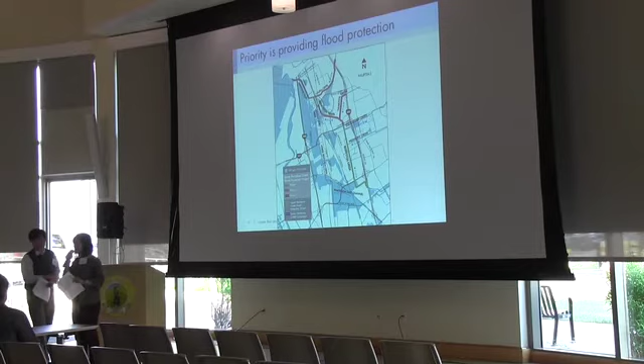So now I'd like to introduce Ngoc Nguyen, the Interim Deputy Operating Officer of Watersheds. You may remember him from last time, and he oversees this project. Thank you.

Good evening, thank you. My name again is Ngoc Nguyen, and I'm currently the Interim Deputy Officer for Watershed Design Construction. My division, I work with a number of staff responsible for designing and constructing flood protection projects for the county. I just want to quickly introduce the team with me tonight. We have Jose Villarreal from our communication office, Peggy Lam in the back with communication, Kristen, who introduced herself earlier, Kevin Gonzalez our assistant engineer, Johan Lee our associate engineer, and James Nanitagos our environmental planner, and then we have Carl Newman, the newest member of the team.

Carl recently received a promotion from associate engineer to engineering unit manager. So Carl is helping me manage a number of projects in his unit, and this is one of the projects now under Carl.

I just want to review quickly for you the map showing Berryessa Creek flowing from south to north towards San Francisco Bay. The most upstream section of Berryessa Creek, from Calaveras Boulevard, Highway 237, going upstream to Highway 680.

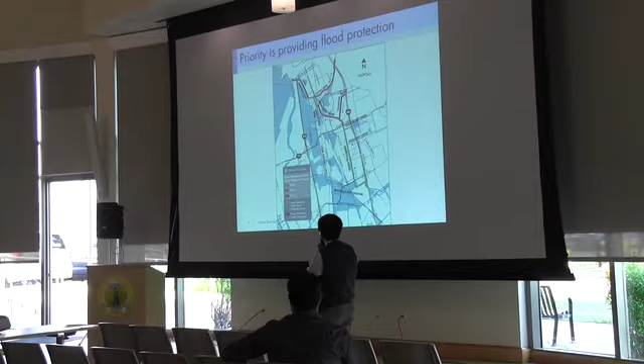Also part of the Lower Berryessa Creek project by the Water District, we have flood protection planned for a portion of two tributary creeks, Calera Creek and Tularcitos Creek. Together, these projects provide flood protection for about 2,400 parcels of homes, businesses, and schools in the city of Milpitas.

Here's another map showing the delineation of the project alignment.

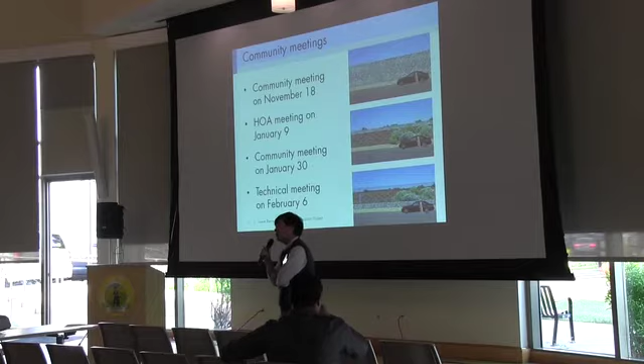This is a quick recap of the number of meetings we've had with your community since November 2016. The last meeting with the larger community was on January 30th, also in this same room. A week or two after that, our technical expert at the Water District met with Mr. Chu and some representatives from your community to look into more detail and get more information from our in-house subject matter expert in hydraulics and hydrology.

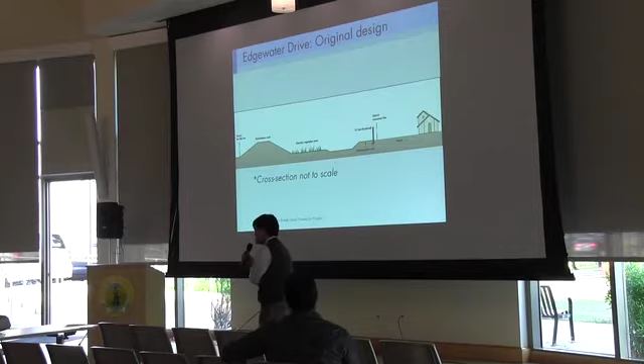Let me quickly recap, because some of you here today weren't at the last January meeting, so bear with me if the information is redundant or you've seen or heard it before.

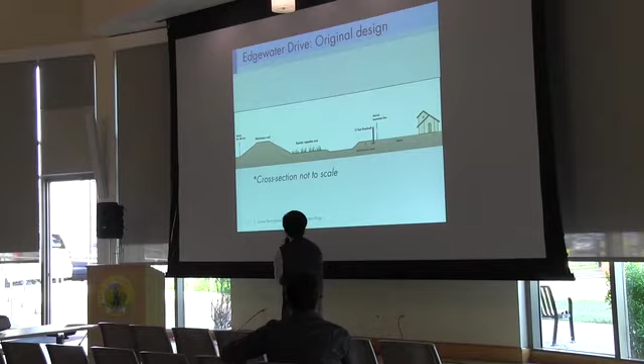The cross-section in front of you shows the current design, which has been approved, permitted, and is under construction. Construction started on this project last summer. What you see is what we refer to as a typical cross-section, looking upstream as if the water is flowing toward you.

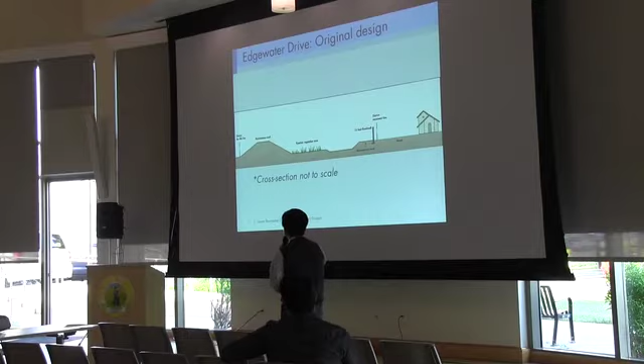The proposed project is a levee raising on the hidden lake side because, number one, we do not have room to provide two levees for this creek and still provide the required flood protection conveyance for the community. We only have enough room to raise one levee, and on the other side we have to build a flood wall.

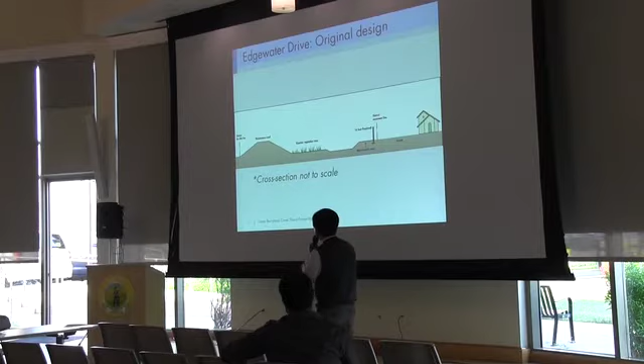The levee was selected on the hidden lake area because there's a top of levee road trail there, a recreational trail maintained by the city of Milpitas, a continuous recreational trail for the city, located on the hidden lake area on the levee side.

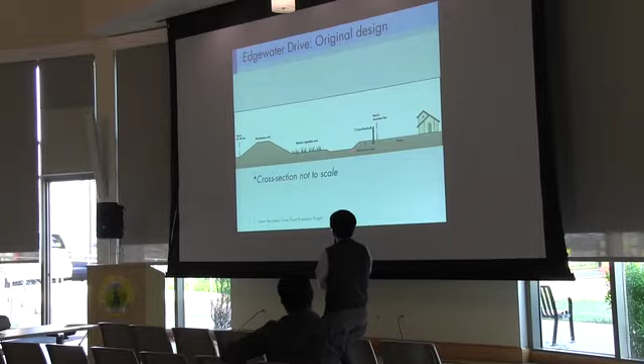The proposed project here, the cross-section showed a flood wall, a low flow channel, a maintenance road so that the water district would have adequate room for crews and construction equipment to be in the channel to maintain the flood wall, to maintain the channel, and to have access in case we need to go in and remove vegetation, debris, fallen trees, or blockage in the channel.

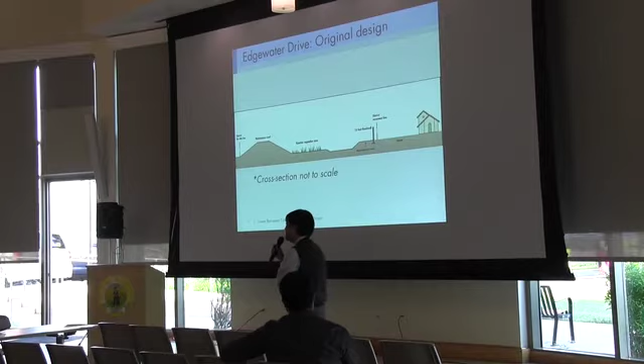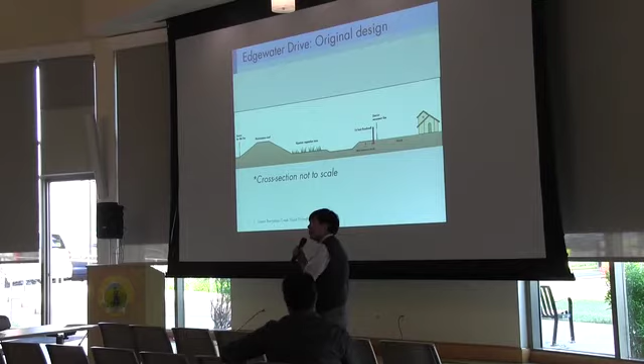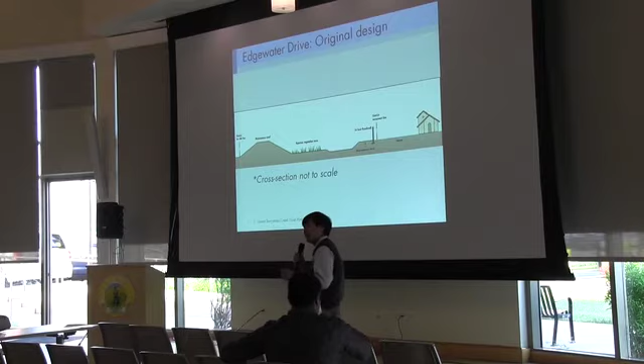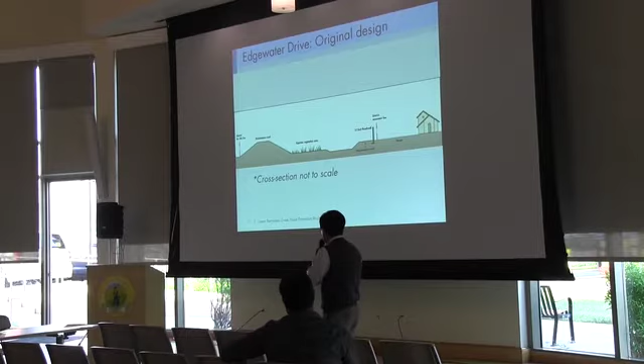On the other bank, there is an area designated as riparian vegetation area. That's the area where trees and vegetation will be planted as part of the project to provide habitat for the wildlife in the creek, and it's also required as a mitigation measure. That's a term Water Resources Agency uses when you have construction or disturbance in creeks or aquatic habitat. The agencies usually require you to compensate for the impact. In this case, the disturbance is to the habitats, the trees, the wildlife in the creek, so planting of trees and vegetation in the creek is a mitigation measure required by the regulatory agency.

One of the options that we presented to the community in January, which we refer to as option number 1, involves pushing the 14-foot high wall. If you remember, before, the wall was close to the curb of Edgewater Drive. This option basically involves pushing the wall 15 feet away from Edgewater Drive toward the creek.

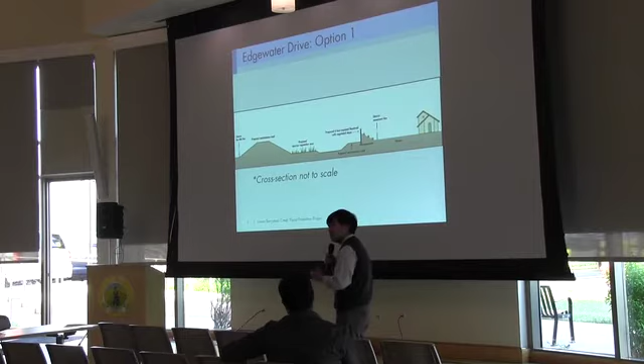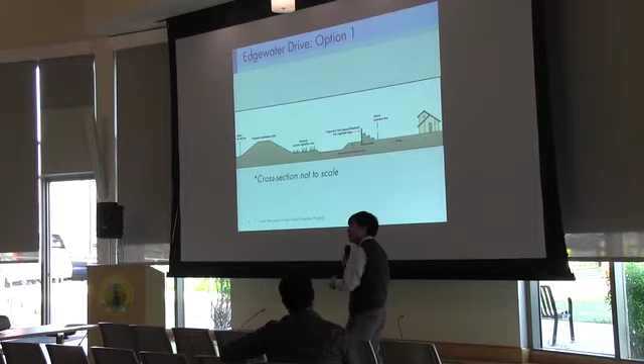The reason for that is to lessen the impact from looking at a flood wall. In this case, the maximum that we can push the wall toward the creek is about 15 feet and still maintain the room in the creek to convey the flood protection flow safely through the area.

We also propose in this option that on the land side of the flood wall we would backfill the embankment with soil, and on the embankment fill we would plant vegetation. Again, it's another measure to lessen the visual impact from looking at the flood wall. The top of the flood wall will have to be exposed about 4 feet, and this is a safety measure because on the other side is a 14-foot drop. We just don't want people to get on top of the embankment fill without a barrier and accidentally fall onto the creek and hurt themselves.

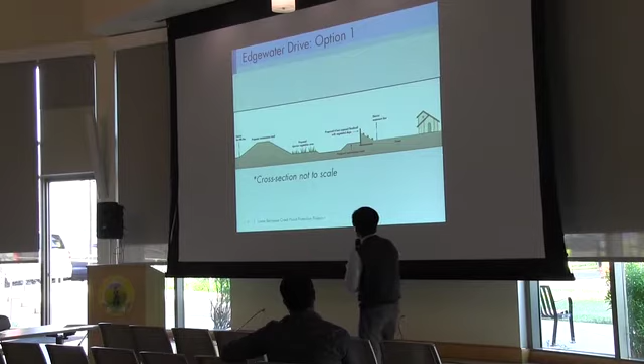Now, to accommodate this option of pushing the flood wall 15 feet away from the street toward the creek, the cross section - the area in the creek - will now be narrower by 15 feet. In order to still accommodate the amount of flow required to provide flood protection, we have to reduce the width of the mitigation planting area by 15 feet. The width of the riparian planting area was about 50 feet in the current design, so this riparian planted area will now have to be 15 feet less.

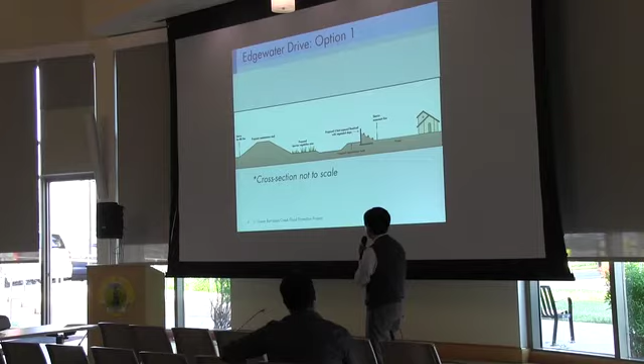We looked at the entire alignment, and we do have room upstream and downstream of the Edgewater area within the project limit to make up the deficit in planting from reducing the width of the mitigation planting. So there is available, limited room in the project area to make up for the reduction in planting, should it be feasible to go with this option.

This option is option 2, which I also presented to the community last time. It has a similar concept of pushing the 14-foot high flood wall 15 feet away from Edgewater Drive. We would also backfill the landside embankment with soil for planting of shrub and vegetation.

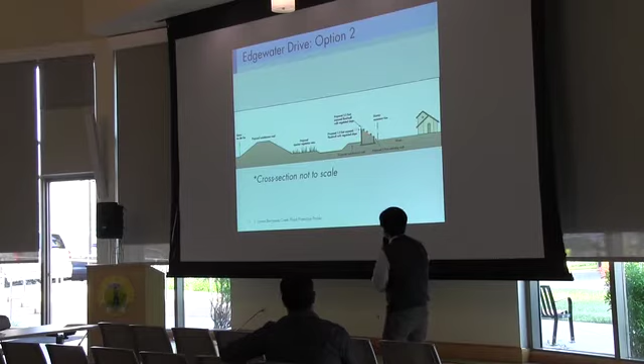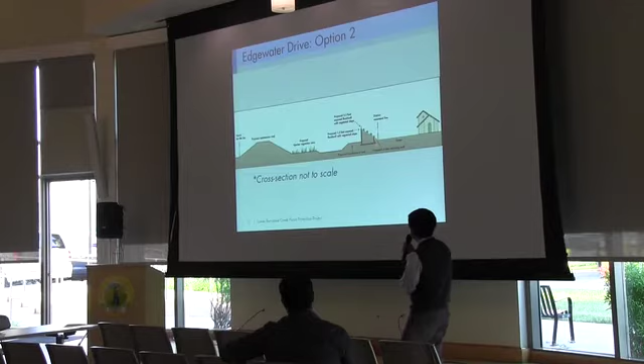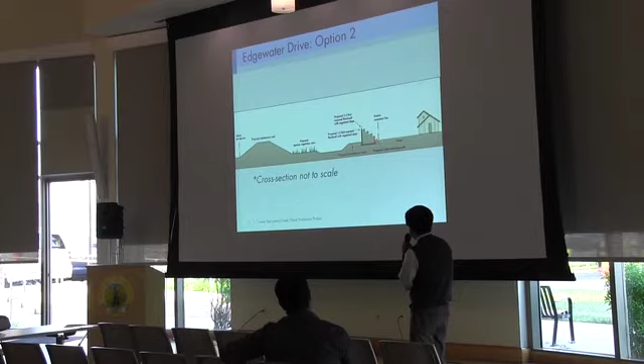The difference between this option and the previous one is that we would carry the embankment all the way near the top of the flood wall, so you'll see maybe 1 foot of the top exposed. In order to have room for that, we will need a retaining structure on the land side to contain the slope, so the proposal is a shorter, maybe 5-foot high retaining structure to hold back the soil and allow backfilling all the way near the top of the 14-foot flood wall.

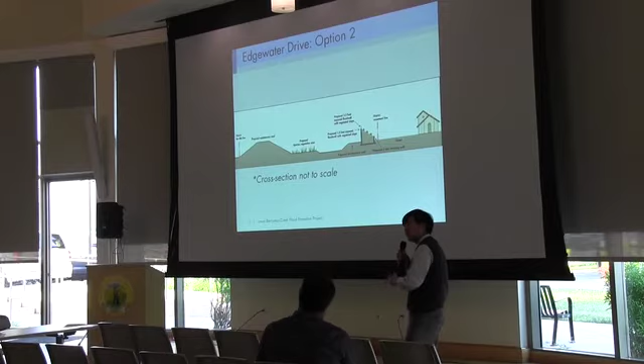Because the embankment soil will be near the top of the flood wall, there's still a concern with safety. So the proposal for this option is to put maybe a 4-foot tall chain link fence on top of the flood wall to prevent people from falling off, since there's a 14-foot drop on the other side.

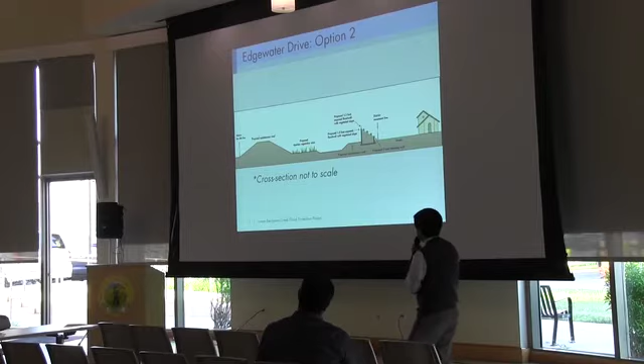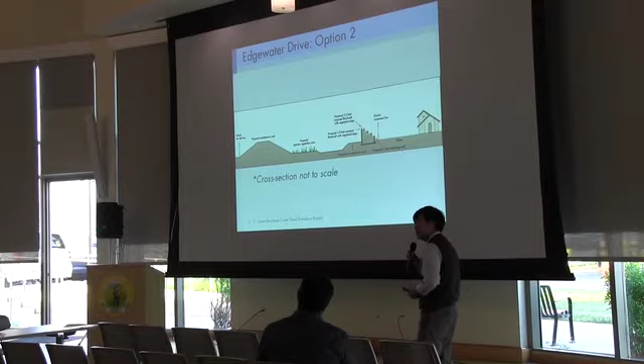The cross-section of the creek would be similar to option 1. We would have levee raising and a trail on the hidden lake area, and we will still have a riparian mitigation planted area reduced by 15 feet. That's the main difference between the two concepts.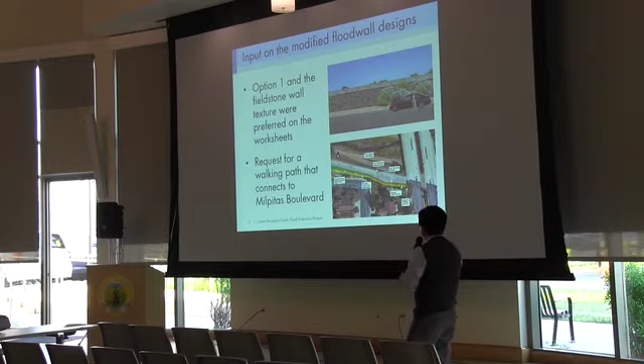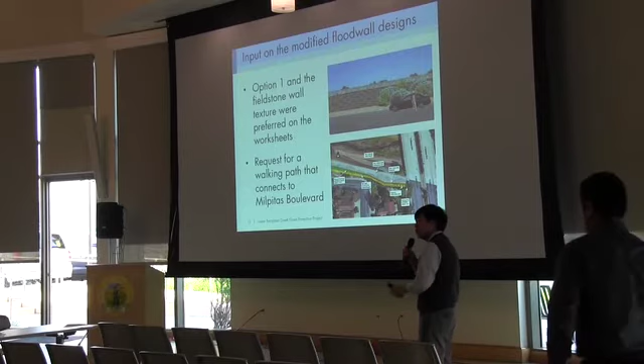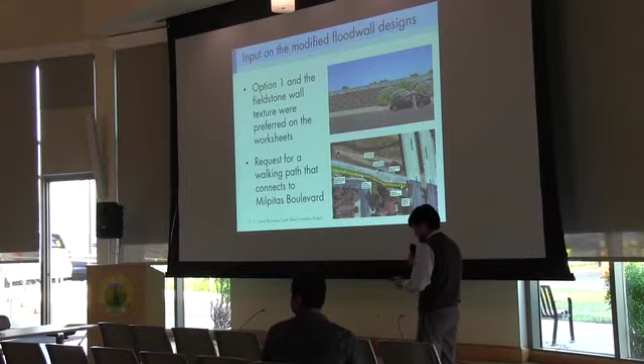When we presented the option in January, we received some more input. The feedback we gathered was that some people who submitted comments would prefer option 1 — pushing the wall in 15 feet and backfilling the embankment with soil for planting vegetation, with no chain link fence at the top.

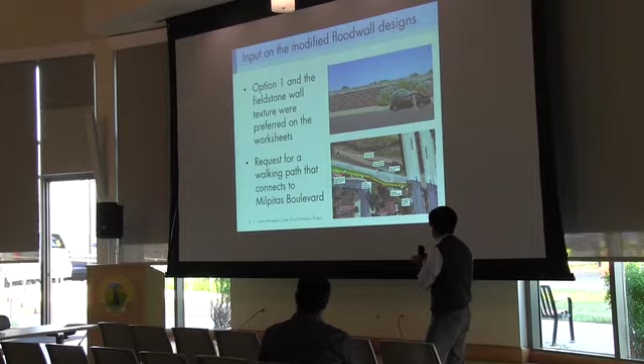We also received feedback near the end of the community, next to North Milpitas Boulevard. Some members of the community requested we establish a walking path from the Edgewater Drive community directly to North Milpitas Boulevard as a shortcut for people to get up and down. Those are the feedback we received.

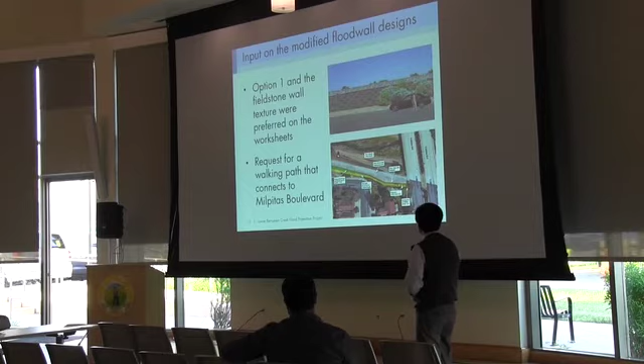We also received a number of other creative suggestions, which I'll review with you. We continue to hear the community asking us to look at ways to not build a flood wall, but to build a levee instead — basically a two-levee system instead of a levee on one side and a flood wall.

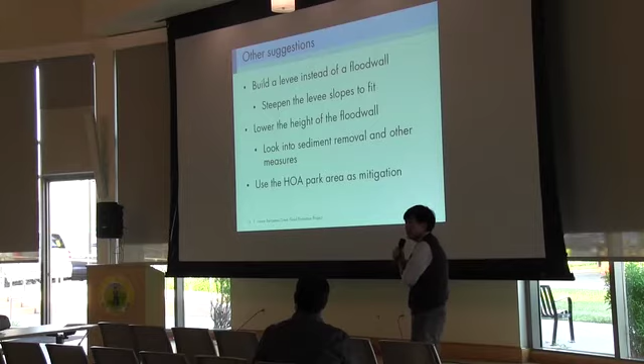We heard another suggestion to look at ways to lower the height of the flood wall. We also heard a suggestion of using the vacant area of the HOA near the playground, at the southwest end of the HOA area, which is currently vacant, and consider using that as a mitigation planting area to substitute for the mitigation planted area along Edgewater Drive, so we can lower the levee and flood wall.

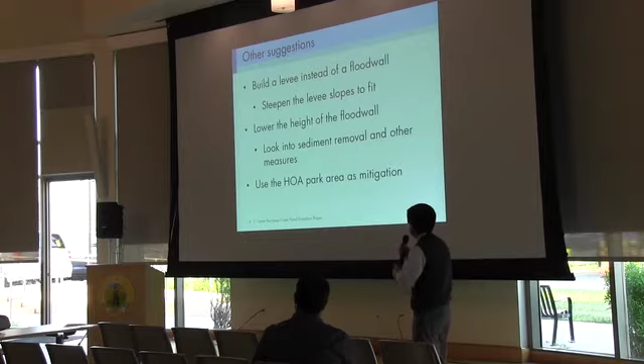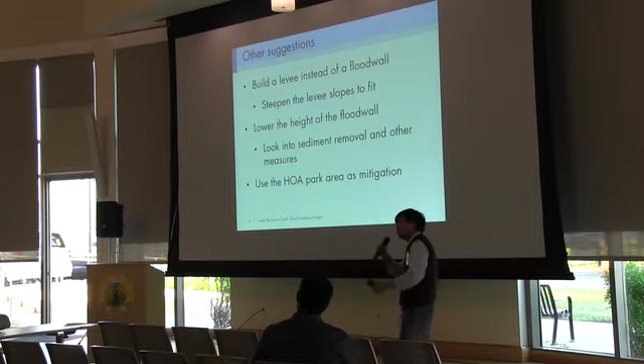Part of the comment about building a levee is that if building a normal levee, we would prefer a 2-to-1 slope — a factor of 2 horizontal distance to 1 vertical distance. If that's not feasible, the comment asked us to see if we can do a steeper slope, which would minimize the room needed to build a levee. The comment also asked us to look at sediment removal and other measures so we don't have to raise a levee or build a flood wall.

So with that, I'm going to quickly present to you the staff's evaluation of some of these recommendations, of some of these suggestions.

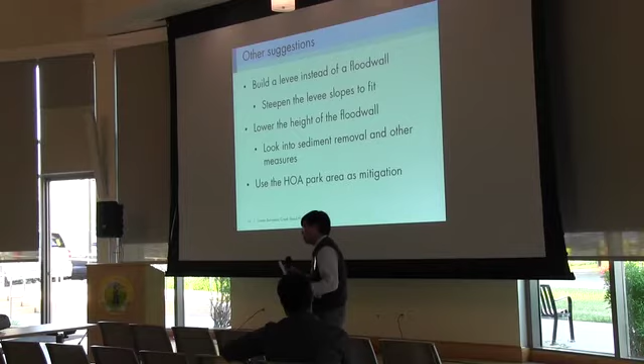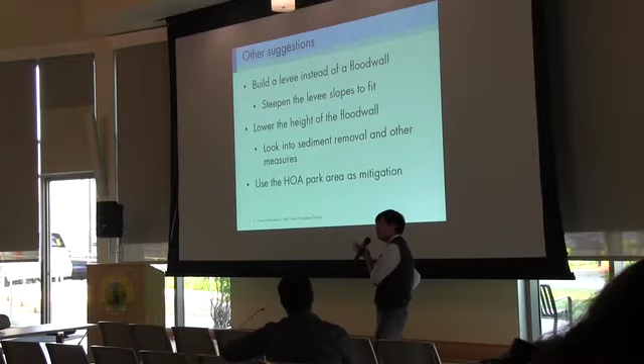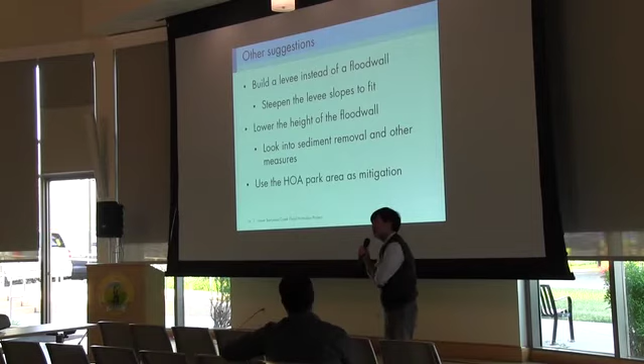Build a levee instead of a flood wall. We relooked at this option again, but unfortunately I have to report back the same thing I reported in January: we just do not have adequate room to build a safe levee in this area with adequate slope and features for maintenance access, while still allowing room for mitigation planting area and adequate room to convey flood water. We will need to encroach onto Edgewater Drive.

Edgewater Drive is about 40 feet, and if we want to build another levee, we will have to encroach 45 feet. Basically, we have to take away Edgewater Drive, and that is not a feasible option.

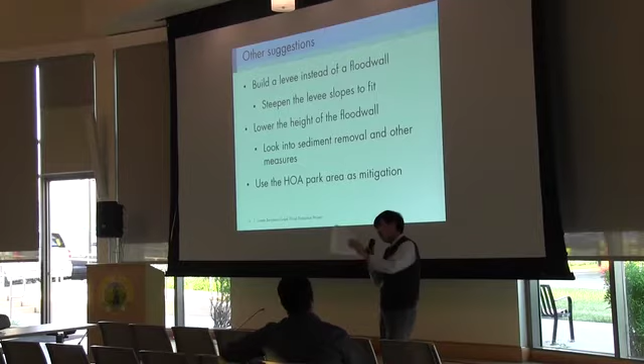Now, the suggestion was, Water District staff, why can't you steepen the slope? Instead of 2-to-1 slope, why can't you do 1-to-1 slope? Basically, that's a 45-degree slope embankment. And yes, we can build a 1-to-1 slope for a flood protection structure. The problem is that in order to make it feasible, we have to concrete line it, on both sides of the embankment for a steep levee like that.

We'll need to have a concrete lining. Number one, that is against Water District policy of doing flood protection work that minimizes impact to the environment. Number two, to propose such a concrete levee structure in the channel, the chances of getting regulatory permits will be very little.

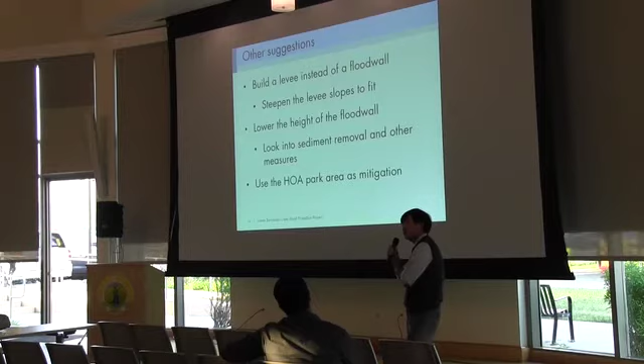So can we do it with 1.5-to-1 instead of 1-to-1 slope? We still don't have enough room if we go to 1.5-to-1 slope. There is not enough room for us to build a levee with 1.5-to-1 slope and still have adequate room in the channel and all the features to make sure we have an adequate maintenance road for equipment to go in and maintain the channel, so the creek can safely convey water.

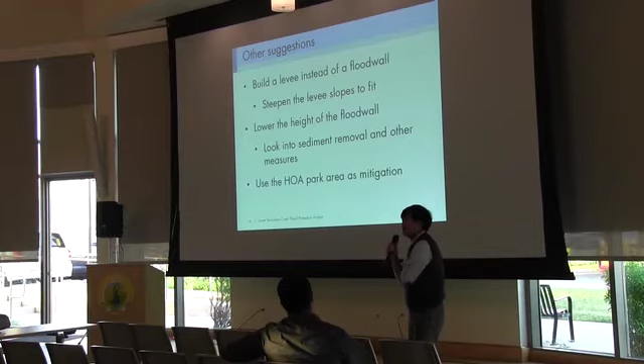A 1.5-to-1 slope will still require some kind of hardscape surface, meaning it would have to be concrete lined as well. We may not have to do it on the back side, but on the water side, on the creek side, it will have to be concrete lined. It will not be feasible—we don't have enough room, and the chance of getting a permit will again be very minimal, because we are proposing a concrete hard surface structure in a natural creek environment.

Looking at lowering the height of the flood wall, we went over the hydrology information and hydraulic design for the creek, based on the amount of flow projected for what we refer to as the 100-year flow, a standard used by FEMA to require a certain area to purchase flood insurance. Our goal is to make sure our flood protection project would be able to convey the 100-year flood flow so the community will not be required to purchase flood insurance.

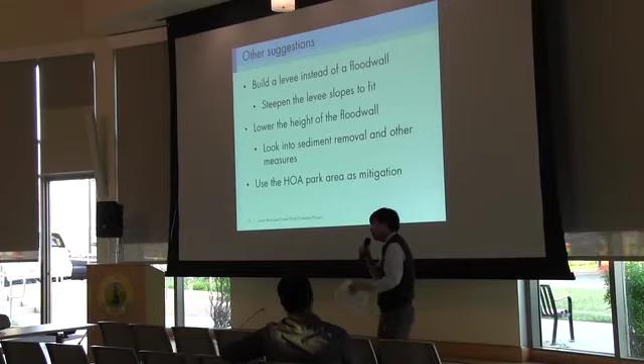So for this area, for the Berryessa Creek system, our hydraulic and hydrology subject matter expert and the Corps of Engineers determined the flow rate required for this area, to accommodate the flow and to also provide what we call a freeboard, a safety factor that FEMA usually requires. If you have a flood wall or levee to contain flood flow, they want us to overbuild the structure by 3 feet in terms of height. That 3-foot freeboard is a safety factor required by FEMA, and we must meet it in order to convey the flow and provide that required freeboard.

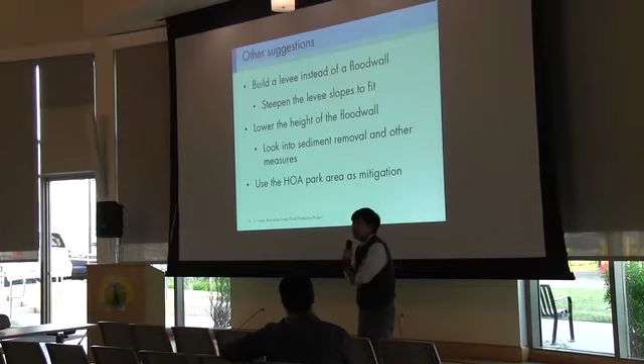Levee and flood wall in the Edgewater Drive area has to be 14 feet high, and we have confirmed that. So we cannot lower the height of the flood wall or levee in this area.

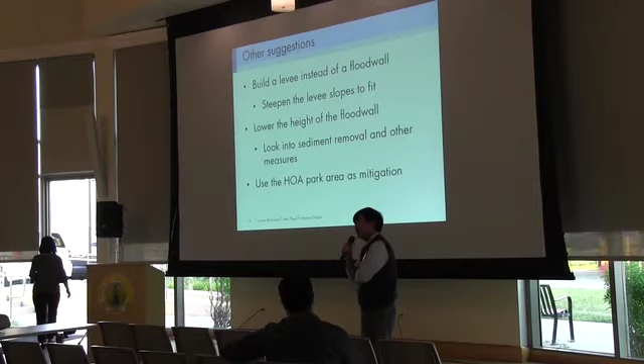We looked into sediment removal and other measures. We designed the creek based on natural hydrology and how the creek flows. We refer to it as the science of geomorphology, which looks at allowing the creek to self-maintain, meaning to flow and transport sediment naturally using the flow in the creek. If you excavate a certain area, you will upset the natural condition of the creek.

In this case, if we just excavate deeper in the creek, what we'll create is just a backcut condition—basically a deep spot just for this area, and it will be occupied either right away by flow in the creek, or it will be an area where sediment will deposit right away. So lowering the creek is not a feasible option.

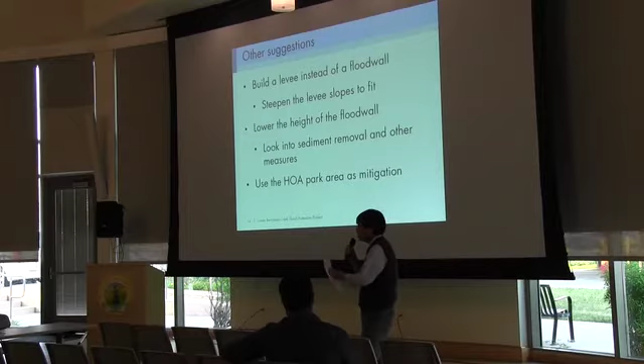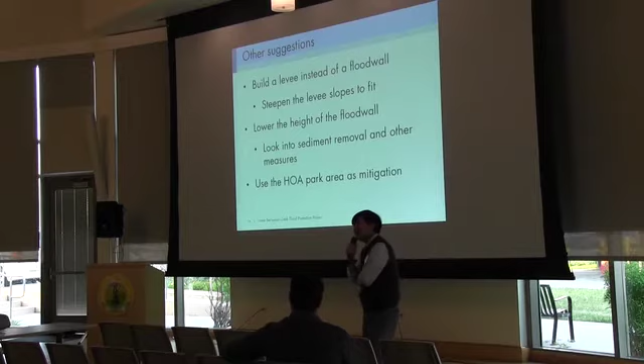We look at the HOA park area as mitigation. The area is very small, probably about 0.1 acres, so it doesn't provide a lot of land surface to allow us to lower the height of the levee or flood wall. In order to use the HOA vacant lot area, the flood wall alignment and maintenance road will have to be realigned, making a very sharp bend in the creek, which is not natural for a creek or conveyance facility. Bottom line, it's just too small and will not make a difference in lowering the height of the levee or flood wall in this area.

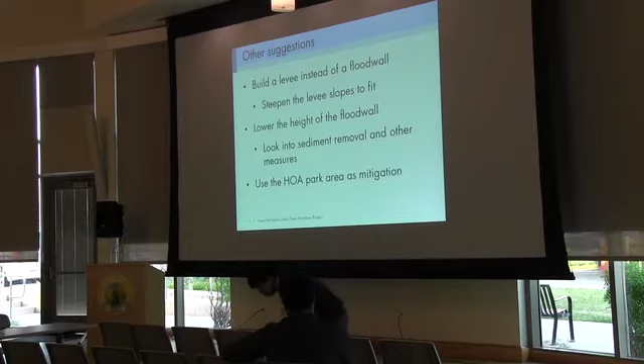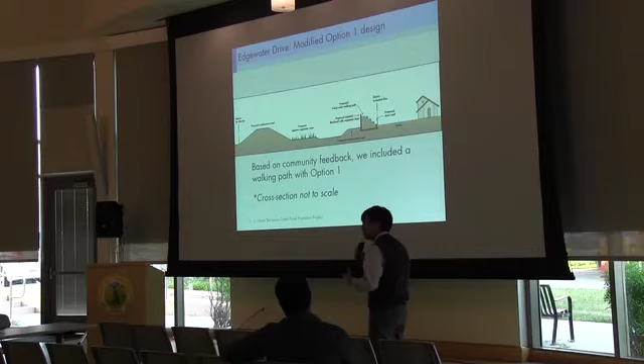From the January 30th meeting, we heard feedback that the community wants a walking trail. They still want a walking path on Edgewater Drive, and they want maybe a shortcut from the area to North Peters Boulevard.

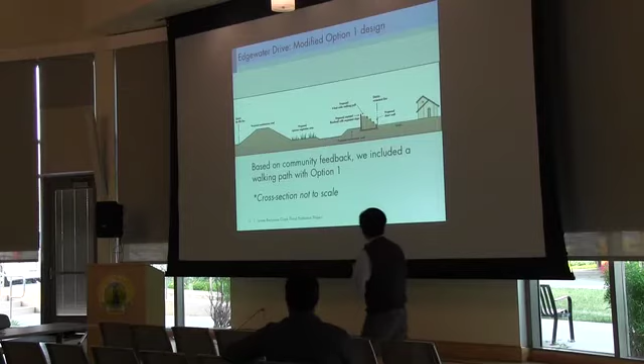Our staff looked at it and think it is feasible. So we looked at option one that I presented earlier, which we refer to as modified option one. It has the same concept as option one, which is to push the flood wall 15 feet toward the creek. In this option, we would also backfill the land side of the flood wall with soil for planting shrubs and vegetation. The difference is that at the top, we will grade it so we have about a 4-foot wide walking path.

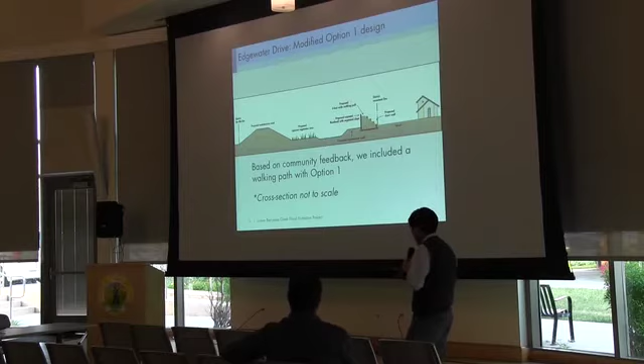There will be about a 4-foot high exposed flood wall on top as a safety barrier. The difference is that we would have a 4-foot wide walking path at the top of the soil embankment. Near the toe on Edgewater Drive, because we need to make room for that 4-foot wide walking path, we need horizontal room to accommodate it. We think we can accomplish that in some locations without the need of a retaining structure, but in some locations we may need a short retaining wall.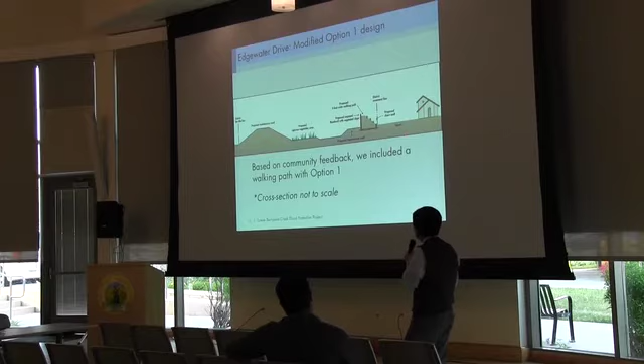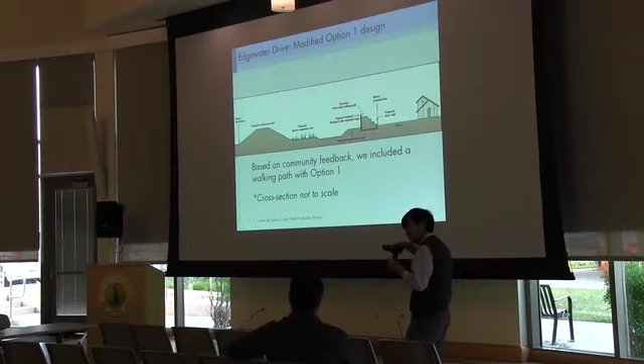When I say short, I want to make sure to note the other retaining wall I showed for option 2 was about 5 feet high. This one would probably be lower than that, probably about 2 feet or less.

Here is just a rendering of what the modified option 1 would look like. There will be a walking path, 4 feet wide on top, and at the toe there will be a short retaining structure.

Here's another rendering showing near the end of Edgewater Drive, near North Peters Boulevard. The comment that one or two community members suggested last time was whether there's a path that a community member could use as a shortcut to walk to North Peters Boulevard. This rendering shows that yes, there is a narrow path we can do. We can provide a stair set there so people can walk from the community up to North Peters Boulevard, getting up and down on the 4-foot wide walking path on top of the embankment levee that I showed for modified option 1.

So what are we doing in the next step? The options I showed you - option 1, option 2, the modified option 1, and the original design option - carry a number of impacts to the project in terms of schedule, cost, and possible delay to providing protection for the community.

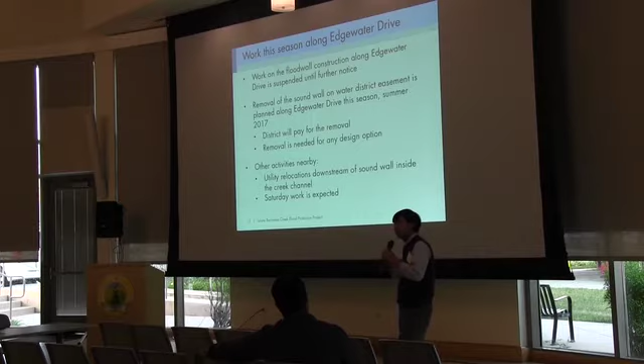In the meantime, we have instructed the contractor to refrain from finishing the flood wall in the Edgewater Drive area for now, and to mobilize upstream of North Peters Boulevard instead of the flood wall area along Edgewater Drive - to do as much work as they can to give us more time to decide how we want to proceed in this area. So as far as construction activity, you should see minimal construction activity on the flood wall along Edgewater Drive in the next few weeks to a month.

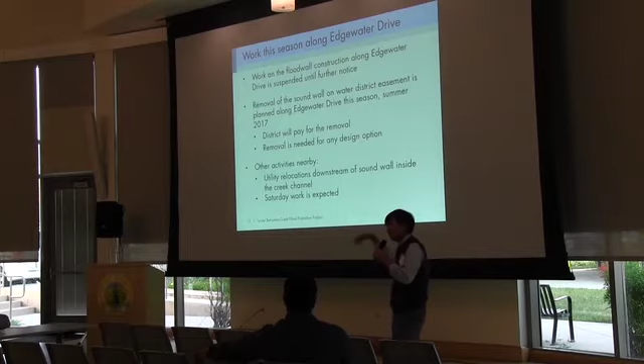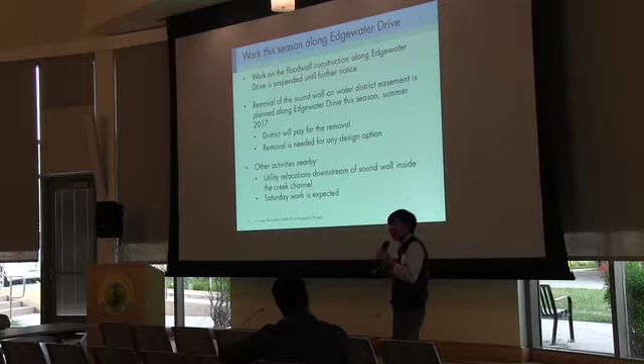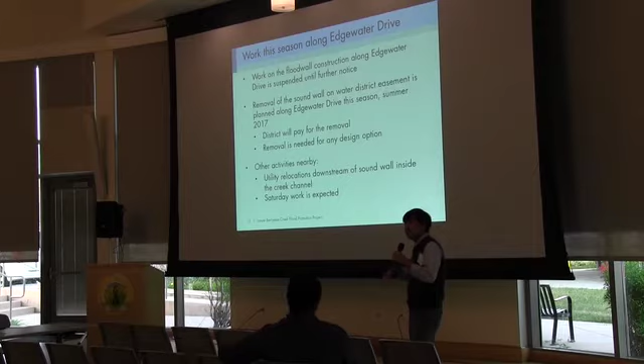But definitely flood wall construction is halted for now, for the next month or two, until I have further discussion with my upper management and can be back in front of you in a month and a half time frame to inform you which direction we are going.

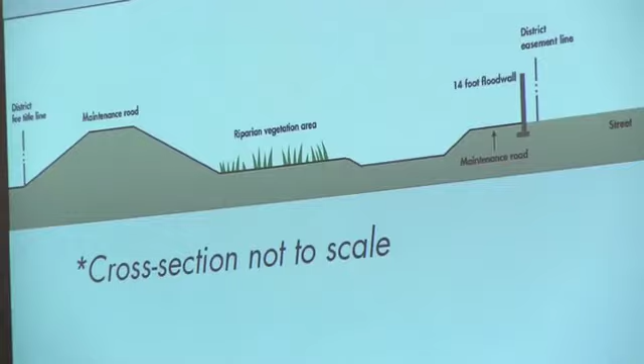As we talked about earlier, the 14-foot flood wall was communicated all the way, with only written confirmation until March 17, 2017.

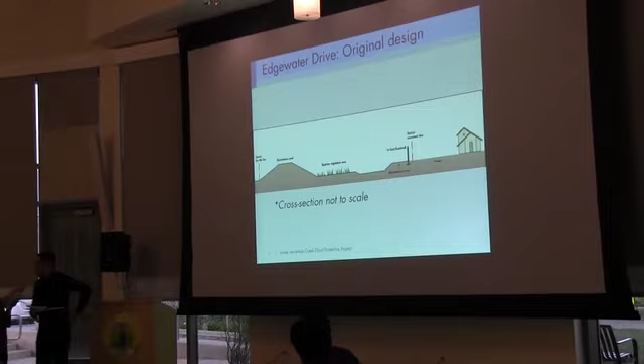I want to ask a question regarding the riparian strip vegetation. That riparian strip was clearly stated in the EIR as the mitigation for the trees being removed from the levee, and Department of Fish and Wildlife requires double the number of trees planted. Anywhere else, the Water District decided to use the riparian strip.

But here we're seeing grasses. They're supposed to be trees. There will be trees, it's just dry. The drawing again is very deceiving. It's a combination of arroyo, sandbar, and red willow that will be planted.

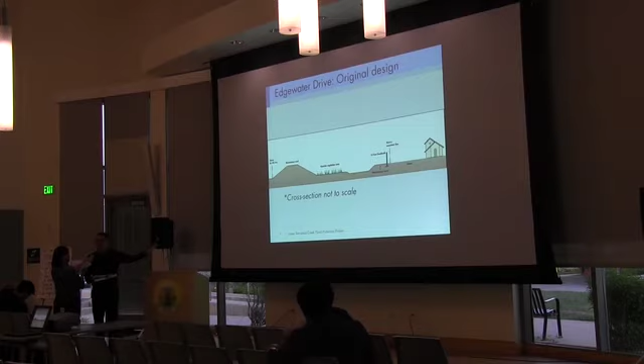Thank you, James, for confirming that will be trees. For the February 21st and 22nd San Jose flooding, everybody is going back to review the reasons why and what could be done better. Until today, it's still unclear whose responsibility it is to clear the vegetation in the creek to allow more water to pass through and avoid flooding.

For this riparian strip, designed as of now at 2.1 miles, 50 feet wide, that's literally 1/3 of the creek channel full of trees. Imagine 20 or 30 years down the road when the trees grow bigger and bigger, it's going to be a flood hazard. The trees in the creek will slow down the water, causing more sediment, more debris, more fallen leaves and dead branches, and this is a huge maintenance cost for this riparian strip.

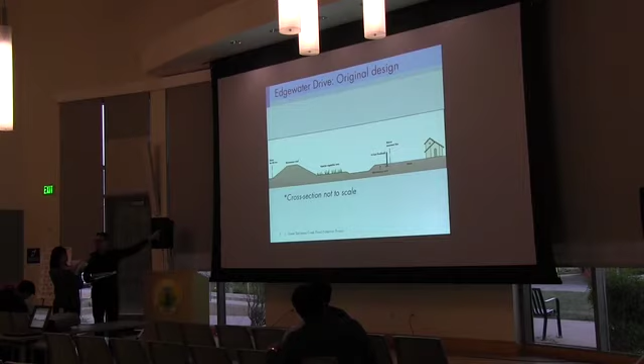Again, right now it shows grass, but there will be trees, double the amount of trees removed from the levee today, and also elsewhere.

Can I move down to the next slide? Keep going down, thank you.

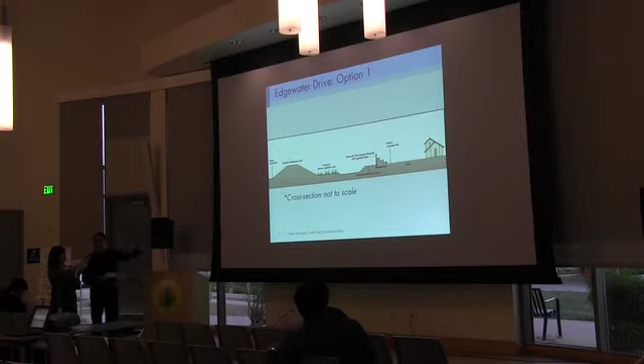So this is the slide we're talking about, pushing the wall toward the creek by 15 feet. Again, this is just for the sake of argument. You can keep the wall in the same place, and we can lower the wall, that's not an issue. So here's the drawing I have.

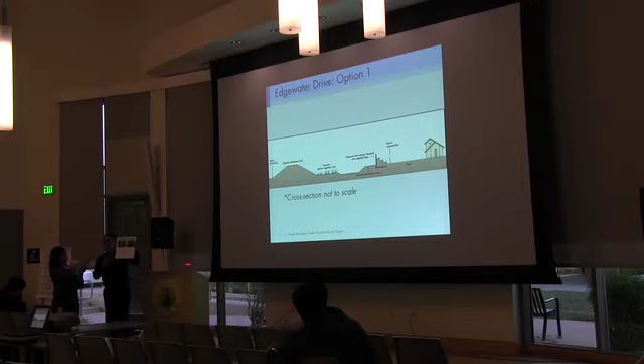Maybe not everybody can see it clearly. Again, the rendering there also has a disclaimer that it's not to scale, and this picture here also has a disclaimer that it's not to scale. So let me show everybody the version that is to scale. Thank you, James, and thank you, Yonghang, for confirming this is all to scale, a very accurate scale. The levee on the north bank is going to be 74 feet wide.

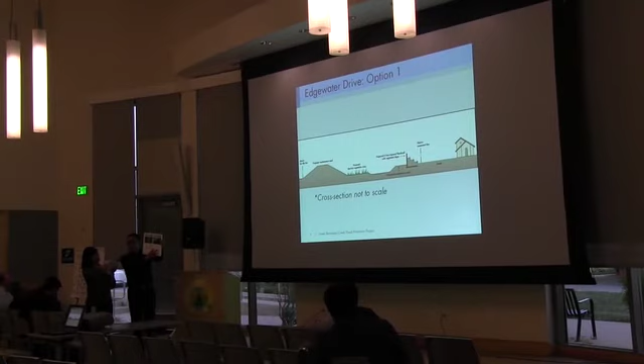Riparian strip will be 50 feet wide. Creek channel will be 30 feet wide, plus 18 feet of maintenance road. So 74, 50, 48. So now the north bank has a very strong levee, 14 feet tall, 74 feet wide. And on the south bank, we only have a flood wall. So the whole entire creek is being shifted toward the south bank.

And having a strong levee on the north, the flood wall has to endure all the pressures. Compared to the 74 levee, there's no way to break it. The flood wall, if we compare, I would consider a huge concern that it will be a breach point. And certainly the Milpitas Boulevard, 12 feet tall headwall over there will be a potential breach point. Can we move on to the next slide?

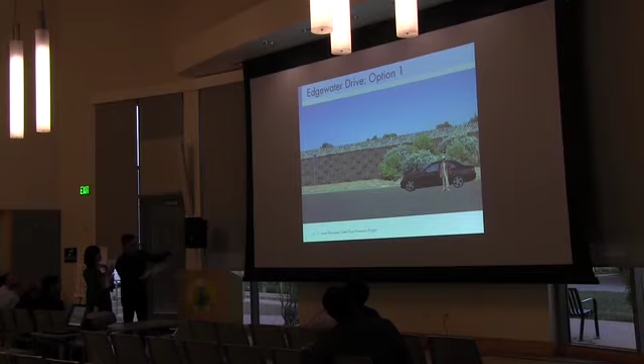Since November 18, 2016, we first brought up the CEQA requirement, the difference between the current design versus whatever was approved and adopted in the EIR back in 2011.

It's been 6 months. There's plenty of time to supplement the EIR, and there's plenty of time to acquire the new streambed alteration agreement, at least to match the current design.

Whatever we consider, the current design is not the original design. Current design is a modified design from the EIR. Again, when there's a law, there's a California state law there to protect the people, and also from something missed in the process. So we have a chance to voice our concerns.

So by the way, thank you Christine for sending the comment with some answers to some questions I raised. One is about the 18 feet maintenance road on both ends: north side on top of the levee, and south side, 6 feet tall, next to the flood wall. The 18 feet maintenance road is considered excessive, meaning more than necessary.